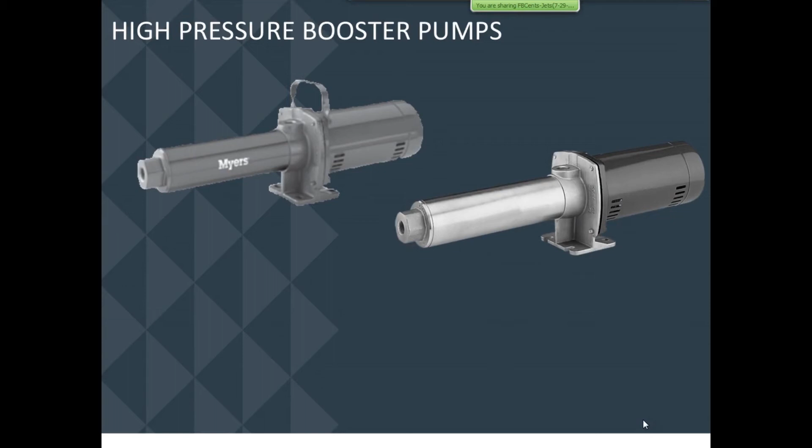So we're going to start out by talking about high pressure booster pumps. You can see by looking at these pictures here, a high pressure booster pump is nothing more than a submersible liquid end on a jet pump motor. That's all that it really is.

You can see that you can put them horizontal like this. I have had people mount them on the wall vertical. When you mount them on the wall vertical, you want the motor facing the top, not facing the bottom. The reason for that is, should there be leakage, if the motor's facing the bottom, it can have water dripping into it. Whereas if you've got that motor facing the top, if it leaks, it's going to go down. It's not going to hurt anything.

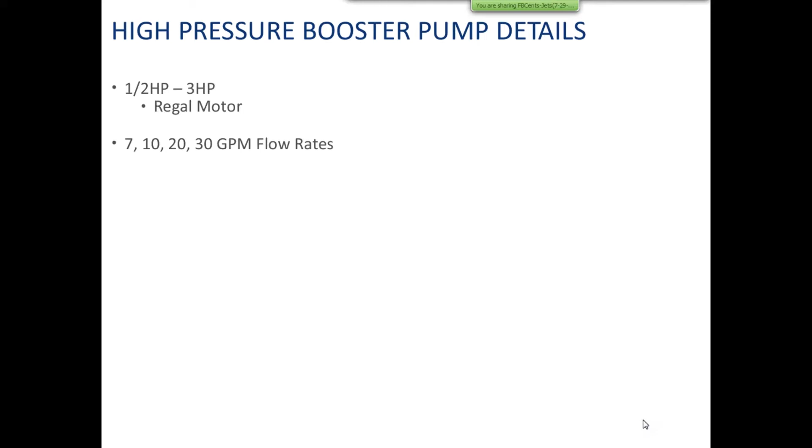High pressure booster pumps come in 1/2 to 3 horsepower. They run with the Regal motor. It used to be called A.O. Smith, but Regal bought them out a couple years ago. They all have the same flow ranges: 7, 10, 20, and 30. They all have a working pressure of 315 psi. Now, of course, that's at shut off, and you really don't want to run the pump there. So be very careful that when you're using this pump, you don't leave it at shut off for very long.

A suction lift to 15 feet. I'm not going to tell you they're easy to prime, but they don't do too bad, and they can lift water up to 15 feet.

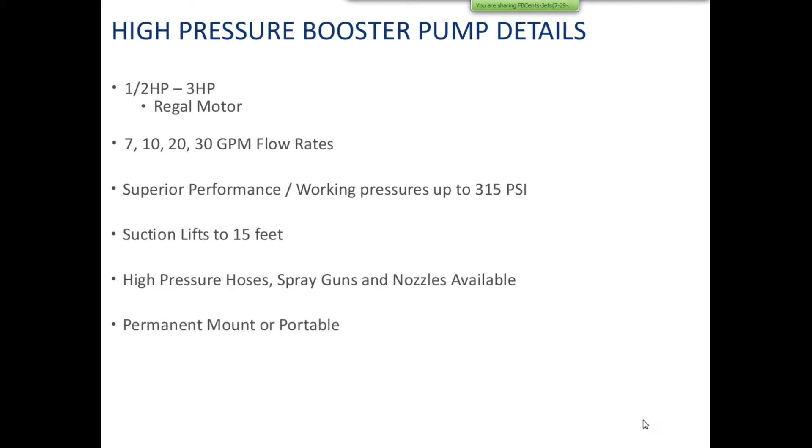You can get high pressure hoses, spray guns, and nozzles available through us. You need to just look in the catalog, and they'll tell you what part numbers to order. Again, you can mount them permanent, or you can make them portable. They've got a handle that goes with them, so you put the handle on there, and now you can pick that pump up and move it wherever you want.

Where does it get used at? Filtration and reverse osmosis - they usually require some high pressures to get through the membranes, and so that's one of the jobs this pump is used for. Pressure boosting, car wash - if you've been to any car washes, they need to have high pressure there. Residential - we sell these to people that use them to spray their house, clean their house off, and so forth. And then lastly is commercial and agricultural.

When they use them for commercial and agricultural, there's a couple different applications. One is chicken farming. What they do with chicken farming is they use this high pressure pump to spray high pressure water into the chicken coops. And as the water comes out of the nozzle, it comes out so fast that it turns into a mist, and they use that to cool the chickens.

They do the same thing for cattle too. You can use it in the cattle area where you're misting. Anybody ever been to a state fair? You know that at your state fairs, they have people misters. Same application - all you do is you run high pressure water through your system, and then have some very small nozzles, and that makes that water break up as it comes out, and it turns into a mist.

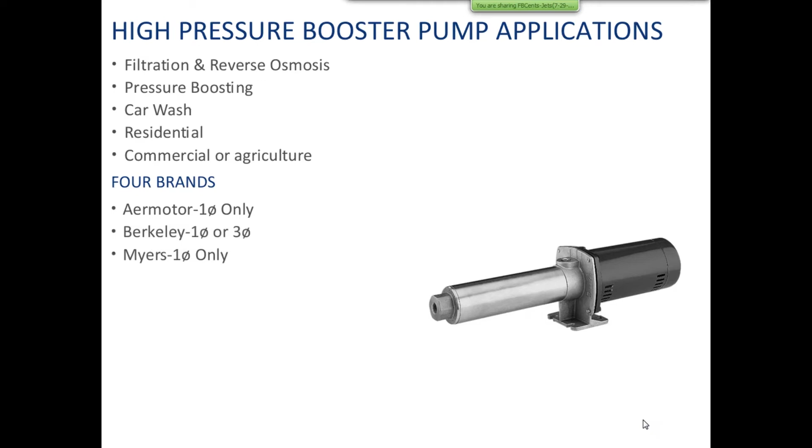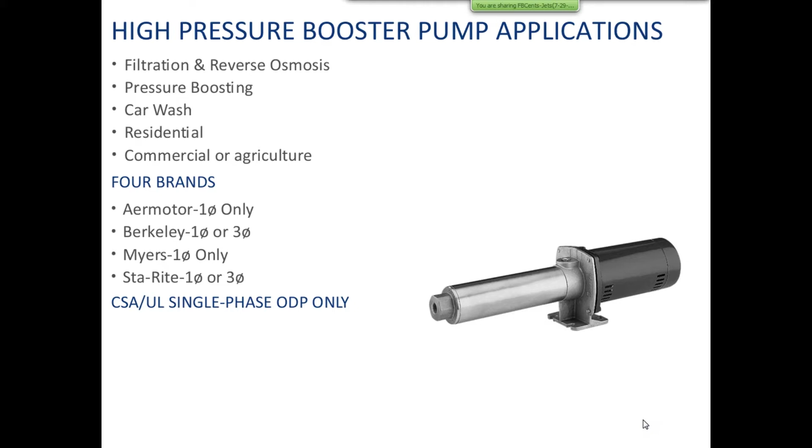So we've got 4 brands. We've got Aermotor - they come as single phase only. We've got Berkeley - they come as single or 3-phase. Myers is single phase only, and Sta-Rite is single phase or 3-phase. I want you to understand that the ODP motors used in our single phase applications are all UL, so you've got a UL listed pump there if you use an ODP motor on it.

Materials: it's 300 series stainless steel for suction and discharge. Now they both have a stainless steel suction and discharge, but they also both offer - I say both, I'm talking all 4 lines - offer cast iron suction and discharge. So you can get them either way. And of course, again, we're talking about just the suction and discharge. We're not talking the stack, we're not talking the shell. We're talking cast iron suction and discharge or stainless steel suction and discharge.

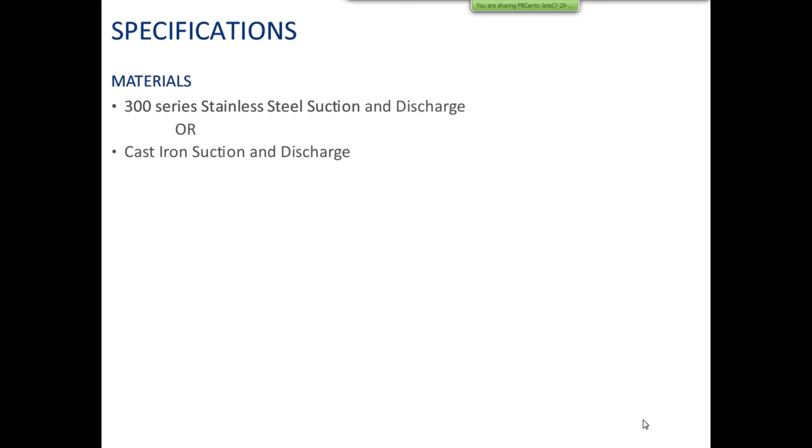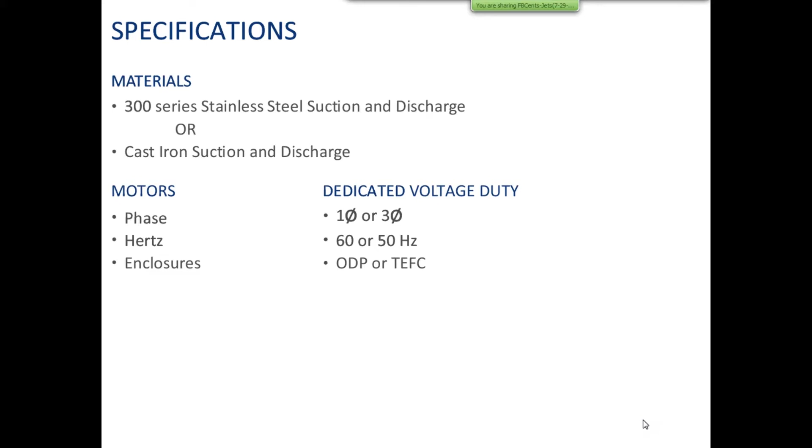You can get the motors in single or 3-phase, especially if you're using Berkeley or Sta-Rite. They come 50 or 60 hertz, so if you're selling them someplace other than the United States, you may want to check and see do they need 50 hertz. The enclosure types are ODP or TEFC. Now remember, with TEFC, you don't get service factor. So you can get this pump either way: totally enclosed, fan cooled, or open drip proof. Maximum temperatures.

The internals on these pumps are made out of acetal and polycarbonate. Because of that, 140 degrees is the maximum temperature that you can run that water through there.

I want to tell you a quick story. We had another application for it. There was a company out in Gloucester, Virginia that was using this pump to add chlorine to their water system. What they would do is pull a line off of their main line, run it through the pump, and then on the discharge side of the pump, they had a suction line connected to a chlorine dispenser. The velocity of the water moving past that suction line would pull that chlorine in, mix it with the water, and that's how they got chlorine in their city water.

They called me up one day and said, hey, your pump's not working, what can we do? I said, well, what's wrong with it? They said it's making noise. I'm sure it's a warranty. I said, well, I don't know. Have you got a discharge valve on the discharge side of the pump? Nope, no valves over there at all. None? Nope. Okay, well, I'll tell you what, send the pump back to me, I'll take it out on the lines and have them test it. If it truly is a warranty, we'll warranty the pump.

So they said okay and sent the pump back. I took it out to the lines and had it tested. They hooked it up to their testing machine and said, yeah, there's a lot of noise going on there, we probably forgot to do something, so yeah, it's a warranty. So I called the guy back up and said, well, the line says it's a warranty, so we'll give you a warranty on it.

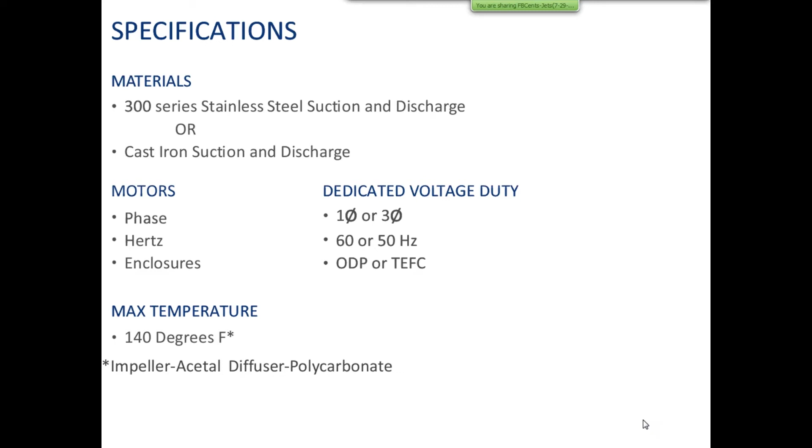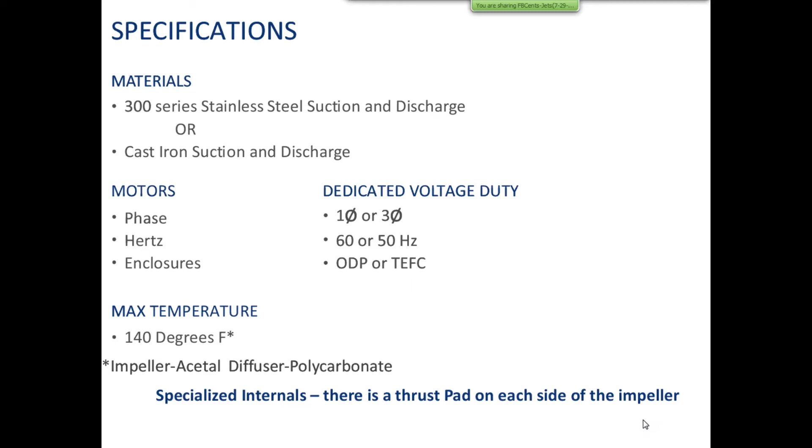It's not a hot water pump. There are special internals. We have a thrust pad on each side of the impeller. Now, that's a little different from our 4-inch submersibles. On our 4-inch submersibles, we've only got a thrust pad on the downside, but here there's a thrust pad on each side, because you're getting actual movement on this.

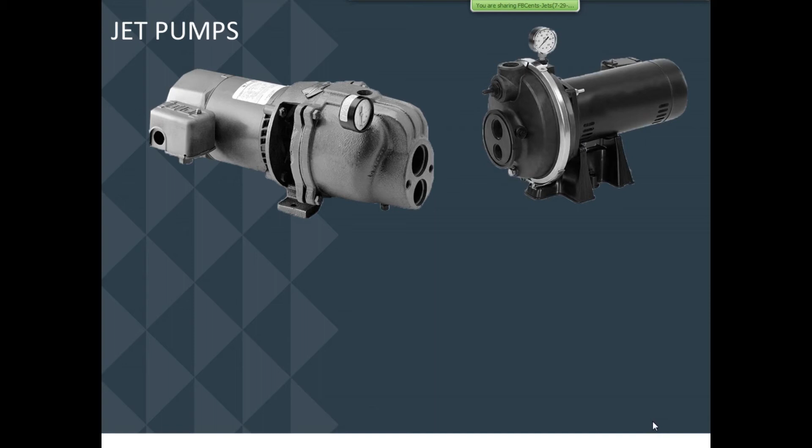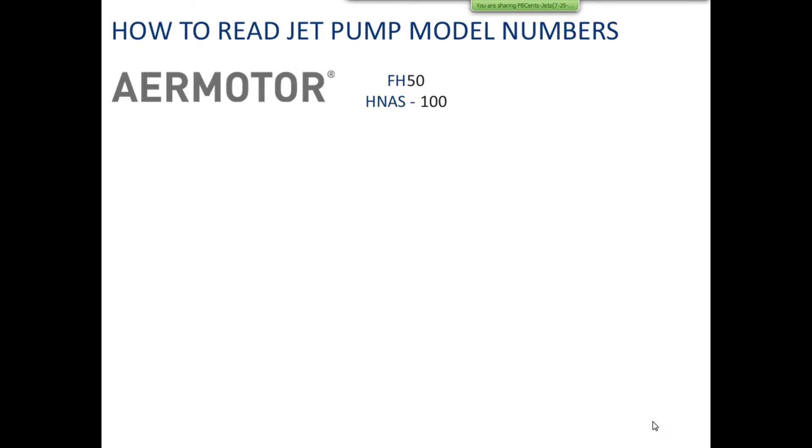So let's take a look here. Here's some jet pumps, and remember, we've got 4 brands, so there's all the different brands. I'm going to break down each one. We'll start with Aermotor, and you can see we've got an FH50 and an HNAS-100. The first part of that model number indicates the series that the pump is in. Aermotor doesn't have a large selection of jet pumps. You can see there's an FH, an FHSN, the HNAS, and the VAN2 - those are the different series of pumps. On the other side, 50 is half horsepower, 75 is 3/4, 100 is 1, 150 is 1.5, and 200 is 2 horsepower. That's the largest we go with any jet pumps, 2 horsepower. So that's your Aermotor model number.

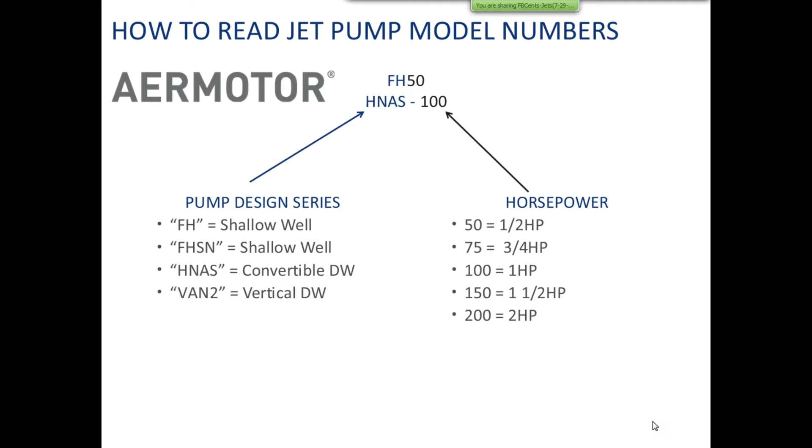Berkeley uses the 5SN-01, and you can see I've colorized each of the different things to help you understand what they mean.

For example, that 5 starts out with horsepower. So 5 is half, 7 is 3/4, 10 is 1, 15 is 1.5, 20 is 2. Remember, 2 horsepower is the largest we go on a jet pump.

They have several different series here. I don't think I've got all of them listed even. There's the SN, the HN, the PN, the HL, the MS. There's more series, I couldn't fit them all on here.

So that's just to tell you what type of series it is. I will tell you this, that N in the part number, whether it's SN, HN, or PN, indicates that it is a designated shallow well pump. You've got an HL, there's also a PL and an SL. That L indicates that it is a convertible pump, meaning that you can run it as a shallow well or as a deep well. The MS is the vertical multi-stage pump, and that is considered to be a deep well pump only.

And then the -01 is a manufacturer's revision number, and it just means that something was changed in the way it got put together. Typically, the curve stays the same, everything else stays the same. It's just they used a different material of construction or something like that.

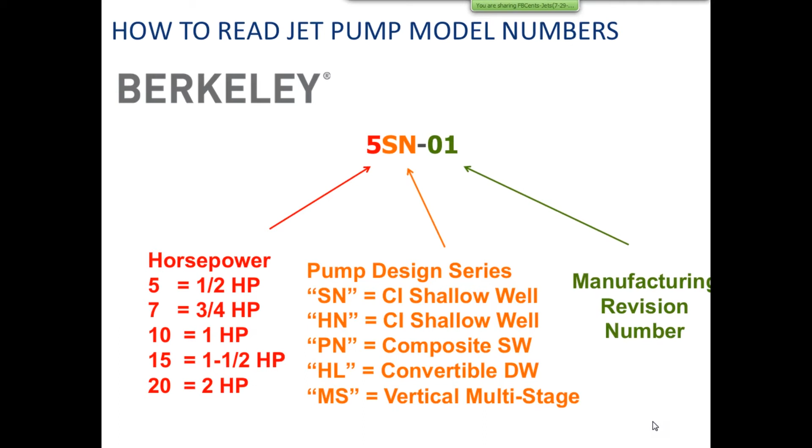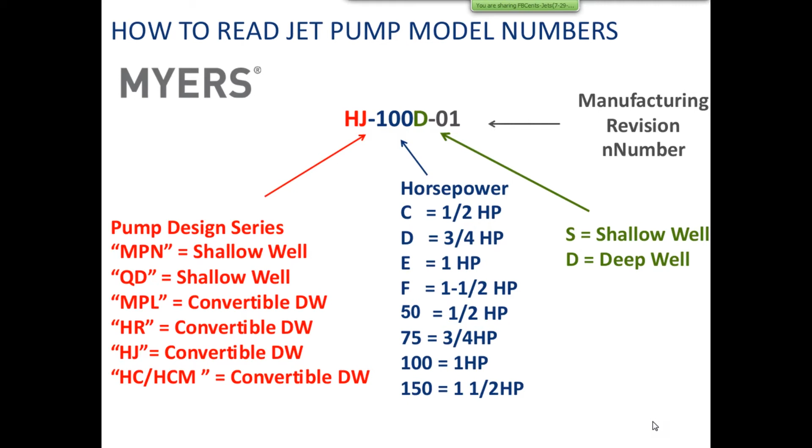S means that it's a shallow well pump. D means it's a deep well pump. D actually is a convertible pump, whereas S means you're going to get that jet bolted right on the pump. If you order an HJ100D, you're going to get a separate jet, and you can put it down the well. And again, there's a manufacturer's revision number just in case there's things that we've changed.

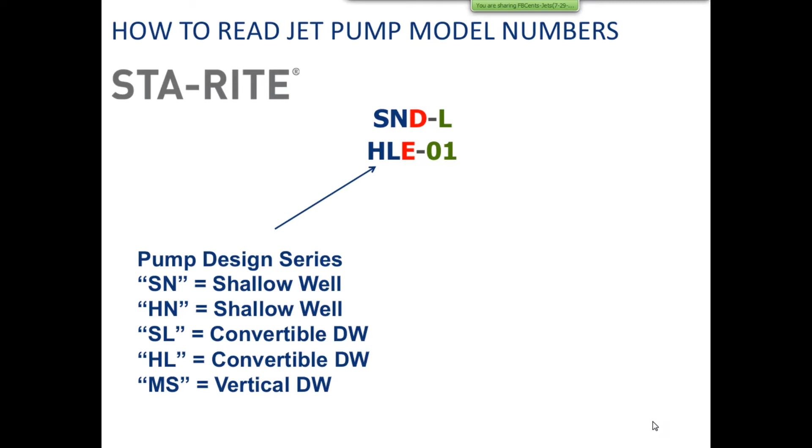All right, Sta-Rite. I've got two model numbers here, an SND-L and an HLE-01. Again, you'll notice by the color, HL and SN, those are series designs. Again, I do not have them all in there. There's SN, HN, SL, HL, MS, HMS, PL, PN, FN, FL. Oh, there's a ton of them.

Okay, so Sta-Rite does have a lot of jet pumps. And then there's the horsepower designation. Sta-Rite was started in 1934 by the then president of A.O. Smith, and he wanted to make a pump that would stay right. That's how they got their name, Stay Right.

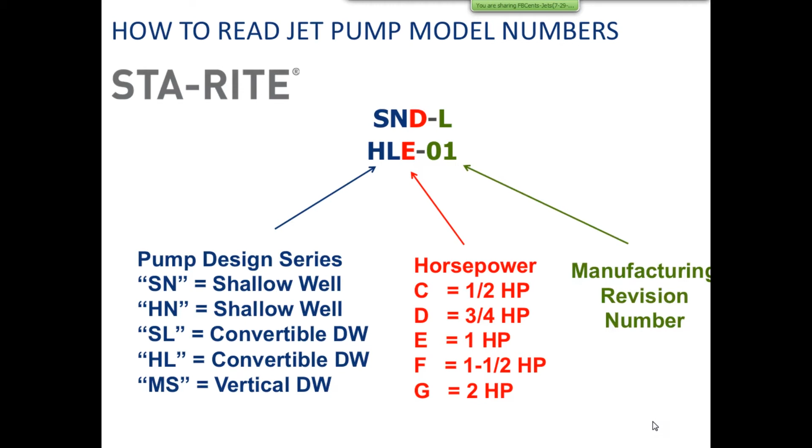And A.O. Smith has always used alpha characters for horsepower. So C is a half, D is 3/4, E is 1, F is 1.5, G is 2. Remember, 2 horsepower is the largest jet pump you're going to get. And then you've got a manufacturer's revision number, and also the L means UL listed.

Now let's take a look at some of the features here. All right, proven materials. We've got reinforced polypropylene diffusers, and we've got Lexan Venturi and nozzles. Now I want to point out just on those 2 points there that we had the largest pump company, or we were the largest pump company with the most plastics. So we made our own plastics for years. And so yes, we really helped develop that kind of stuff.

They use a square D adjustable pressure switch. There are 2 different square D switches, just so you know. And so the S series pump uses the less expensive one. The H series pump uses the more expensive one. The difference is the less expensive one only has the main screw that holds the cover on the square D pressure switch, whereas the more expensive one has a second screw in there, which allows you to set the off pressure, so you can change your off pressure on those pumps. You can't do that with the standard pump, okay?

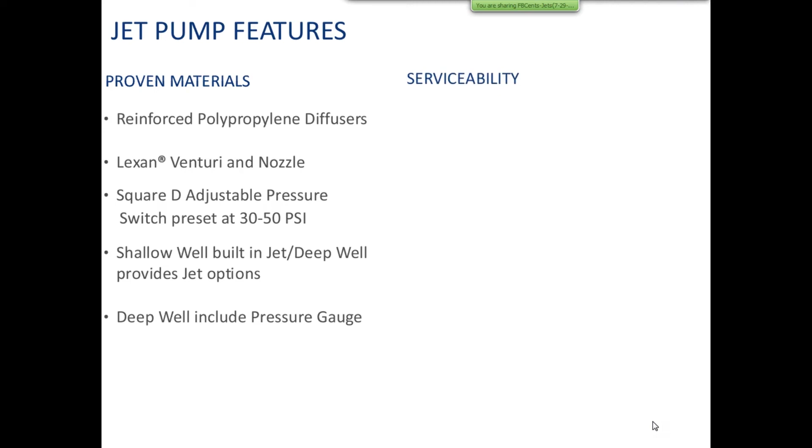You've got the shallow well built in jet, or the deep well provides the jet options. Remember, when we say deep well, we're talking convertible, so you can use it shallow or deep. And then, of course, the deep well also includes a pressure gauge. What makes it serviceability here is that it is a standard 1.25 inch suction, 1-inch discharge.

Just about everybody's got that. There is an easy access clean out plug for your nozzle. On the very front of the pump, on your shallow well jet pump, you'll find a pipe plug. When you take that pipe plug out, that takes you right into the back of the nozzle. So if something is plugging it up, you can get in there and unplug it without taking the whole pump apart. Now, that's not to say that sometimes you don't have to take the pump apart, but if things work out well, you wouldn't have to.

There's a pro-style composite switch tube connectors. In other words, what we're using here is a tube connector where you simply push in on the connector and you can push the tube in or pull the tube off. It used to be in the old days that they had bayonet fittings, and with those bayonet fittings, you were going to cut that tube, then cut the portion off, and you'd have to hope that the tube was long enough to reconnect it. Otherwise, you had to buy a new tube. But with these new tube connectors, you don't have to worry about that.

Built-in pressure regulator on your deep well pumps. It's not on the shallow well, they don't need it, but on your convertible type pumps there are actually two chambers, and one of those chambers has a hole in it that connects the small chamber to the big chamber. The small chamber is where you're going to find that pressure regulator. It sits right over that hole, and basically what you're doing is regulating how much pressure you're allowing to go down to that jet when you're using this pump as a deep well pump, because if you don't have enough pressure going down to the jet, it's not going to work. You're going to regulate that properly so you can set that depth to water, and that means it keeps that certain amount of pressure on. Whatever water you get, that's what you get based on that depth to water.

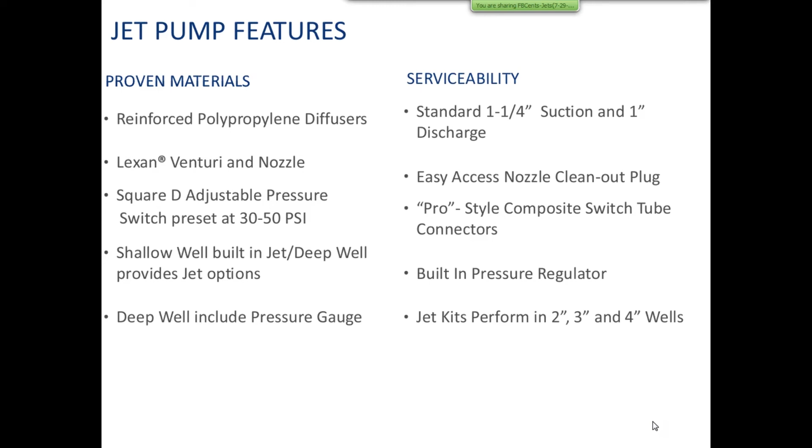Okay, let's break them down by type now. So the CJ pump, it's a Sta-Rite pump. It's stainless steel, corrosion resistant, designed for RO water. It only comes in 1 and 1.5 horsepower. It primes at 15 feet to water, and it'll prime in about 3.2 minutes, which is pretty good priming. Performance-wise, jet pumps typically are listed at 40 psi. So the 1 horse will do about 11 gallons a minute at 40 psi, and the 1.5 horse will do 16.2 gallons at 40 psi. Now again, this is also at 5 foot of lift, not including the 15 foot of lift, which is just your priming. Your lift for this flow rate here is 5 foot. It is shallow well only. Remember, shallow well means 25 feet to water.

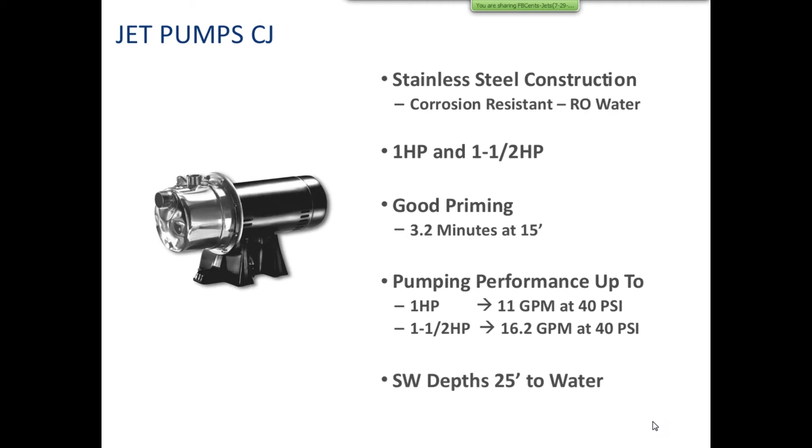Now, the HN HL series, you can see by the pictures there, the HN has the jet formed right into the front of the body. The HL has 2 holes, which makes it a convertible pump. They're both cast iron construction, and they run half, 3/4, and 1 horsepower.

Fast priming at 15 feet, that shallow well will do 1.1 minutes to prime. Shallow well pumping performance, again this is at 5 foot: half horsepower is 12.5 gallon, the 3/4 horsepower is 20.8, and the 1 horsepower is 28.3.

Your shallow well, remember, means 25 feet to water. With the jets that you can use on here, if you put a deep well jet on, 4-inch deep well jet, 2-inch deep well jet, 3-inch deep well jet, takes you down 120 feet. Yes, remember that as you go down, your flow rate reduces. So you get down to about 120 feet, you might only be getting a gallon or a gallon and a half of water a minute, but still, you're getting something.

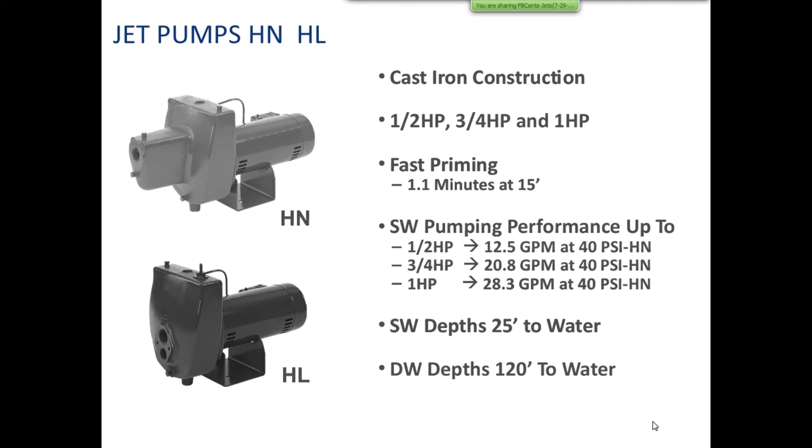The SL series, now the only difference between the HL and the SL, if you look at these pumps, the only real difference here is the S and the H. Otherwise, the part numbers and everything else pretty much are the same.

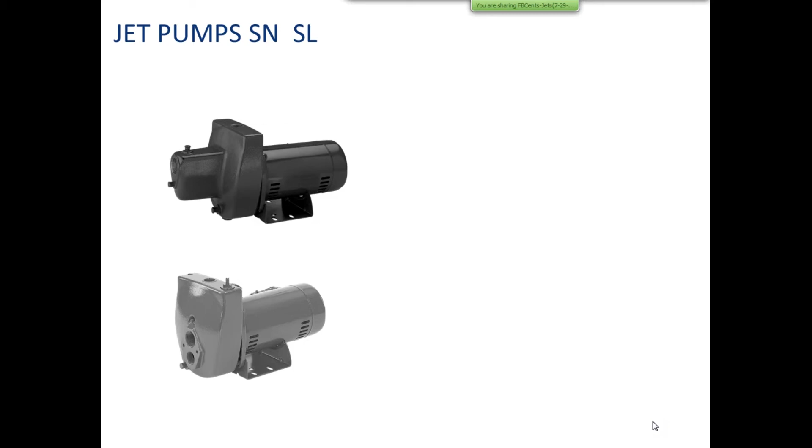But what does it mean? Well, you'll notice that the H came in half, 3/4, and 1. If we take a look at the SL, it's got that same cast iron construction.

It now goes half through 1.5. The S means standard service factor. So when we say it's a 1.5 horse motor, on there that's a 1.5 horse pump. Believe me, it's a 1.5 horse motor. On your HL series, H means high service factor. When you increase the service factor, you decrease the horsepower. So 1/2 through 1 there would be the same as the 3/4 to 1.5 here, just so you understand that.

Again, at 15 feet with that shallow well, you're going to get 1.1 minutes for priming. And here's your performance. Remember, you're 25 foot to water. 7.9 for the 1/2. Now remember, the 3/4, the 1, and the 1.5 are the same as the 1/2, 3/4, and 1 on the HL series. So you see the flow rates are the same also.

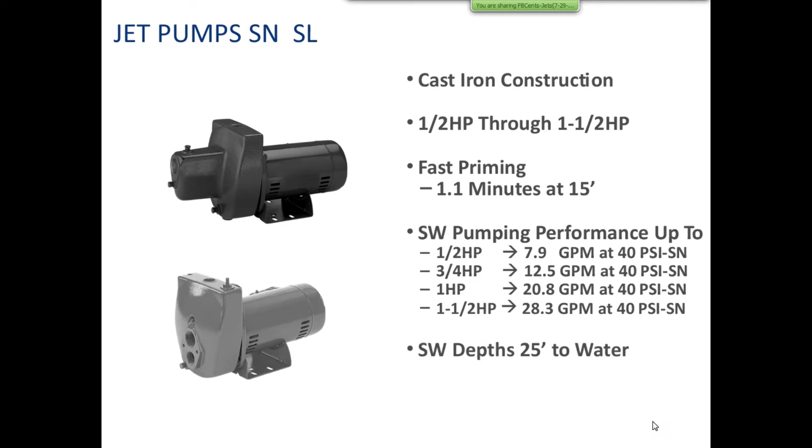Again, just a reminder, 25 feet to water is shallow well. Anything deeper than that is considered deep well. And these can go down to 120 feet also.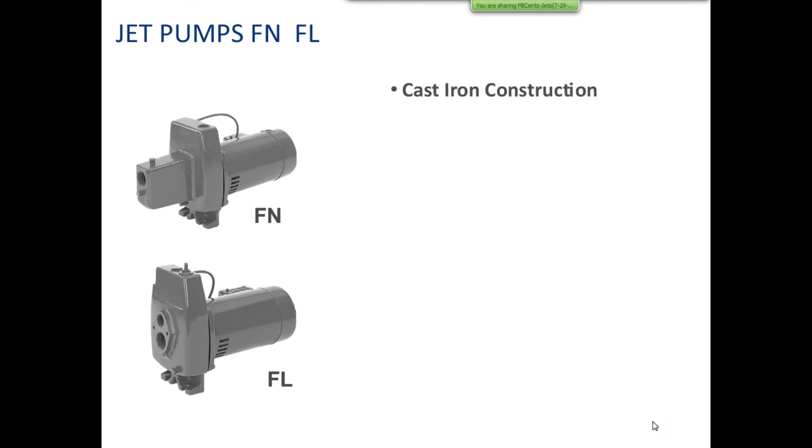Your FL and FN, again, you're going to notice they're a little different here. Not quite as big of a body there, but they are cast iron. They only come 1/2 and 3/4. They're 1.7 minutes, that's the shallow well, at 15 feet. And the shallow well performance at 5 feet is 6.9 for the 1/2 horse and 12.5 for the 3/4 horse. So they're really a pretty decent pump.

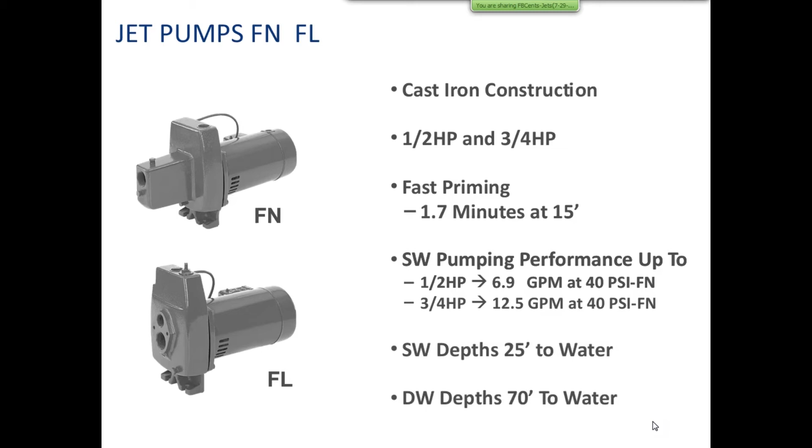Considered a lower line pump, but for what you're getting, that's quite a bit. Again, just a reminder, 25 feet shallow well, 70 feet for deep well, because you're only doing 3/4 here. Now your PL and PN series, the P in there means plastic or composite.

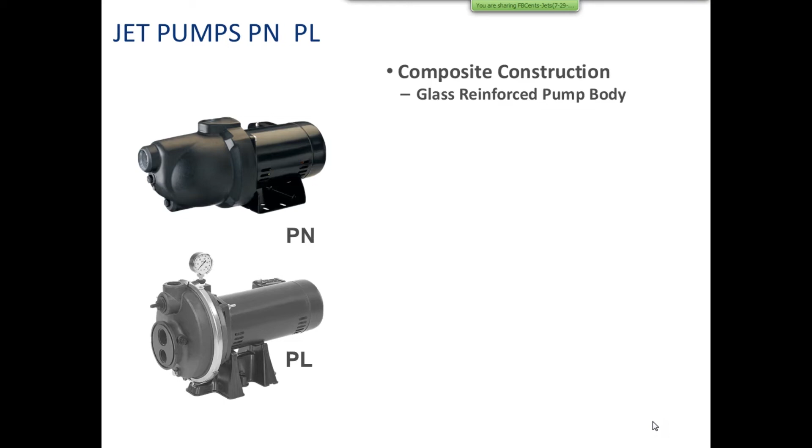So if you look at the pictures there, you can see these have a composite pump head on them. It is a glass reinforced pump body, so it's very, very tough. Obviously, because it's plastic, it's corrosion resistant. They are 1/2 to 1 horsepower in shallow well, that's your PN. And then they go 1/2 to 1.5 in your convertible, that's your PL.

The shallow well performance, remember we're at 5 feet to water here. 1/2 is 7.4. The 3/4 is 10.7. The 1 horse is 16.8. Remember that we only go up to 1 horsepower in shallow well, but you can take that 1.5 horse because it is a convertible pump. You can put the jet right on the front of it, and that 1.5 horse at 5 foot to water is going to give you 26.2 gallons at 40 psi when you're using it as a shallow well pump.

So you put your shallow well jet on there. Performances are obviously going to change when you put the deep well jet on. At 25 feet to water for shallow well, and here we're going 120 feet to deep well again because we got our 1.5 horse back.

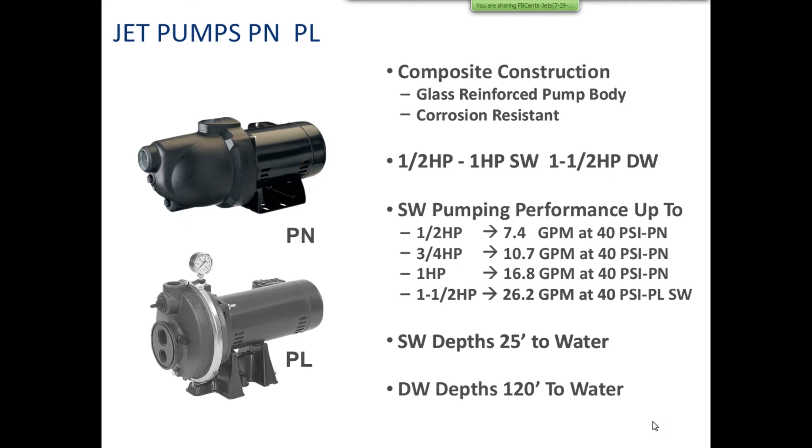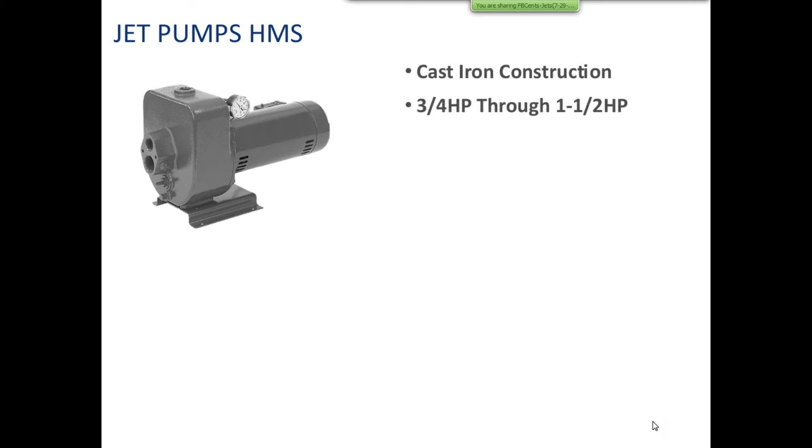All right, now here's a special pump. It's called the HMS series. It is a cast iron construction. You can see a nice heavy body there. It does go 3/4 to 1.5 horse. It is a dual stage impeller diffuser. So in other words, they've got 2 impellers in here and 2 diffusers in here. And because of that, what that's going to do is increase your pressure.

So your pumping performance, shallow well, 3/4 horse, notice it's 8.8 gallons at 40. Remember, we're at 5 feet to water here. 1 horse is 12.2 at 40, and the 1.5 horse is 15.9 at 40. If you go deep well with this one, the 3/4 is 12.8 at 40, this is at 30 feet to water. 1 horse is 17.8, and your 1.5 horse is 21.7.

Here's what makes this pump so special. You can put a 1-inch pipe plug in that top hole. That's the drive hole. Yes, Sta-Rite was always drive over suction. If you notice, all the other pumps we were looking at are suction over drive, but they always used to be drive over suction, and since this is a special pump, they left it the way that it was.

If you plug that drive hole, now you can use it as a self-priming centrifugal pump for sprinkling. At 5 feet to water, you're talking 24 gallons a minute at 40 psi, 33 at the 1 horse, and 46 at 40 with the 1.5 horse. So you can see this pump can really deliver water, and it's really got a wonderful application here. You can use it for a lot of different things.

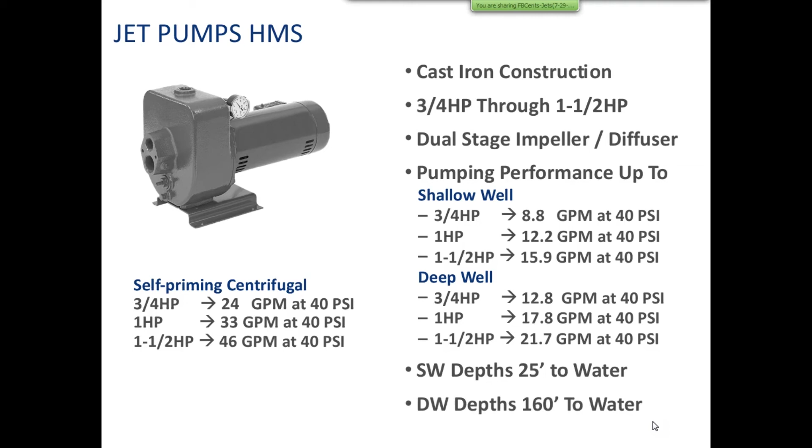Shallow well, again, just a reminder, 25 feet. And deep well, because this one is a 2-stage pump, deep well is 160 feet. Remember, it's the pressure required down the well that allows you to go down deeper. So because this one creates higher pressure, because it's two-stage, you can go deeper with it.

Now, the multi-stage series, the VMS series. It is a cast iron construction. It's 3/4 through 2 horsepower, and notice it is vertical. Dual stage impellers and diffusers. There are actually 2 impellers and diffusers in the 3/4 and 1, and there are 3 impellers and diffusers in the 1.5 and 2. Factory installed pressure regulator.

You can see that it's an external pressure regulator. It's not an internal regulator here. Okay, pressure gauge sits on top of that regulator.

All right. Deep well 30 feet performance, because remember, this is considered a deep well pump only. 3/4 horse at 30 feet to water will give you 10.2 gallons at 40 psi. The 1 horse will give you 12.1. The 1.5 will give you 12.2, and the 2 will give you 12.2. The main difference between the 1.5 and the 2 is how much you're going to get as you go deeper.

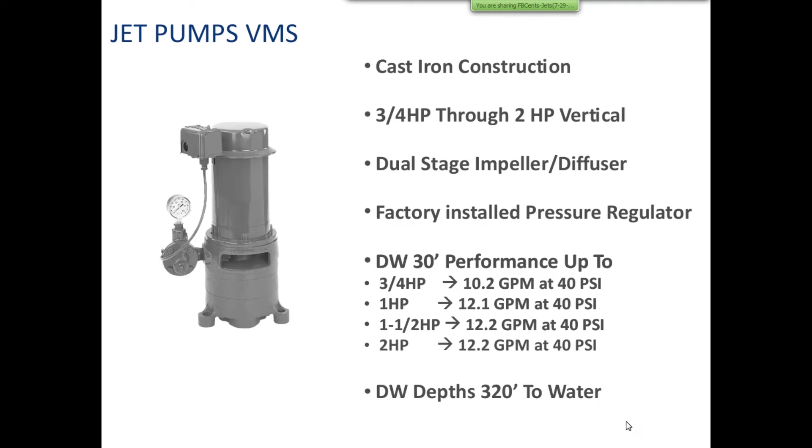They have depths because there is a 3-stage pump here. Your 1.5 and 2 are 3-stage pumps, you can go down 320 feet. Now again, these are a very high pressure pump.

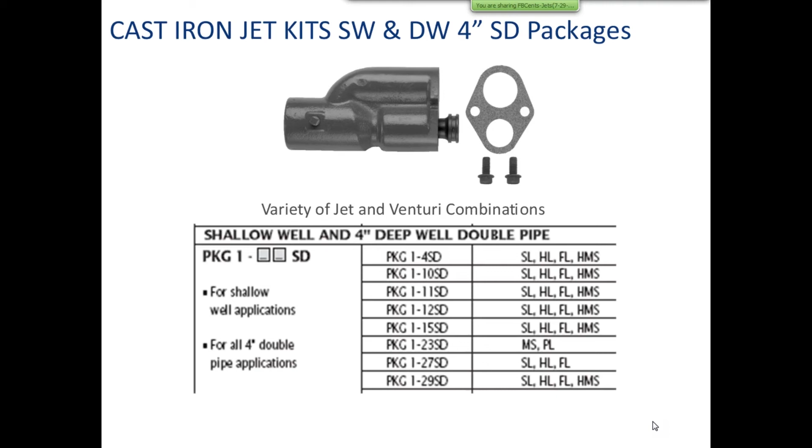SD means shallow or deep. There's only one body, there's only one nozzle, there's only one diffuser. So it's either going to get used as shallow or it's going to get used as deep. Now, some of them might be used as shallow or deep. Some of them are just shallow. Some of them are just deep. But that's what SD means, is shallow or deep.

Then we have a shallow and deep well 4-inch package that's called the CK package. When you look at the CK package, you're going to notice that there are multiple venturi tubes. Still only one body, only one nozzle, but multiple venturi tubes. Now, this is really, really important that you understand this, because in order to use this CK package, you have to make sure that you're putting the right venturi tube in when you put this thing on the pump.

If you look carefully, you'll notice the white venturi tubes are a little longer. And if you look carefully at them, on the ends of them, on the discharge side, they have a notch. That notch is designed strictly for insertion. So when we insert this into the body here, we use that notch with an air tool to tighten it up and torque it properly.

The black venturi tubes are round all the way on the discharge side, and the reason for that is because they're going to butt up against that diffuser ring that I was pointing at when I started the presentation and told you about the factory schools. So make sure that you've got the right venturi tube in there.

And yes, we get phone calls all the time. Somebody will say, I hooked this pump up and I can't get it to prime. And I'll say, which venturi tube do you have? And they'll say, well, whatever one was in it, as if the other ones were just extras. And I'll say, okay, go get the other venturi tubes and tell me what the number on those venturi tubes are. And sure enough, they'll have the right one in their hand. And then I'll have to say to them, pull that jet up and put the correct venturi tube in. You won't have any problem with it priming.

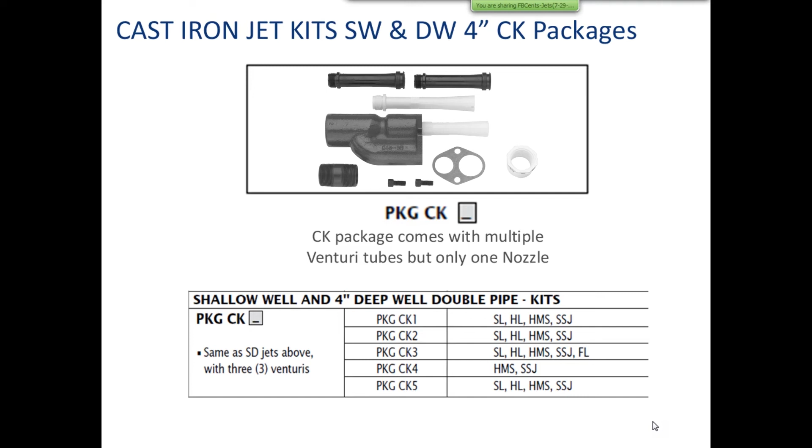So how do you know which venturi tube to use? It's going to be in your catalog. So you got to have a dealer catalog, and that'll help you.

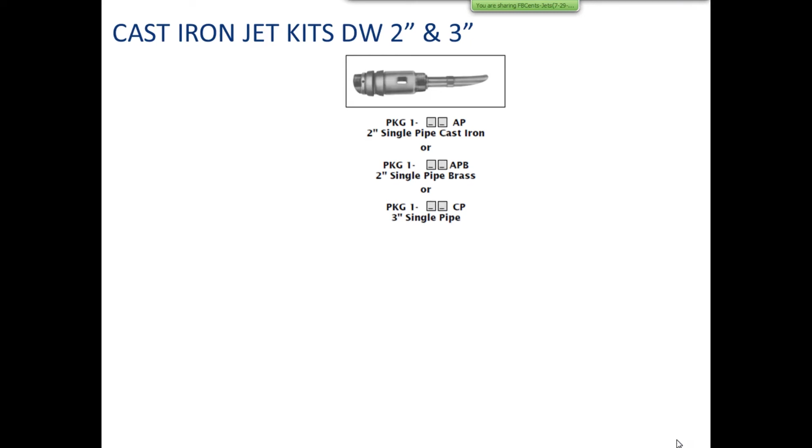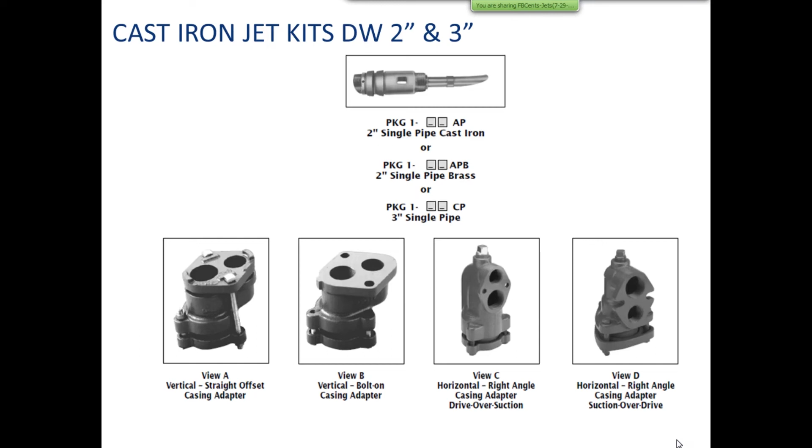Now, of course, that also means that you have to have the correct adapter for it. So I want you to look at these adapters here. You'll see there's view A, view B, view C, and view D. Very important, when you look at C and D, you should recognize right away view C is the old Sta-Rite way of doing it. That one would get used on the HMS series pump. View D pretty much gets used on all the other horizontal pumps. View A and B get used on the multi-stage pumps, the vertical multi-stage pumps.

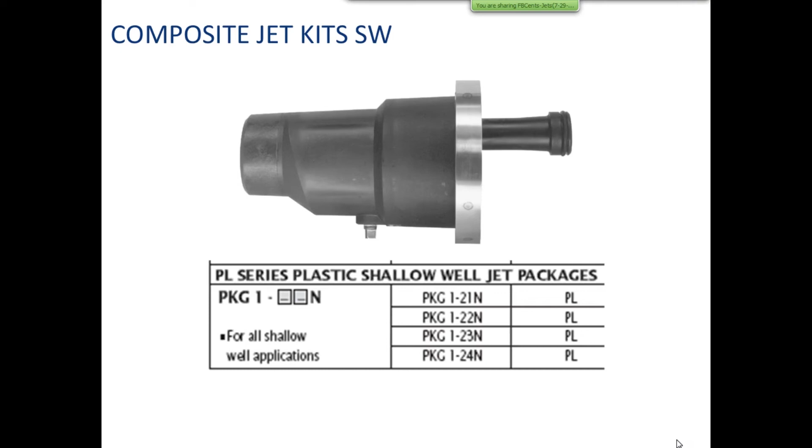Now, the composite jet, this is for shallow well use only. When you're using the PL series, and you can see that's the only series of pump that's in there, based on the horsepower, we'll decide which one of these jets you're going to use. The 21 is the half, the 24 is the 1.5. So if you want to use that PL series pump as a shallow well, that's how you're going to do it.

Now, this is the Aermotor pump, and you're going to notice again they've got a series that starts out here. So SPC is a series, SPCA, CT, DMC. Those are all series of pumps. They do use on some of their pumps a letter to indicate the head. So M means medium head, H means high head. If there is not a head letter there, it's going to be a high head pump, because most people want that high head, that high pressure.

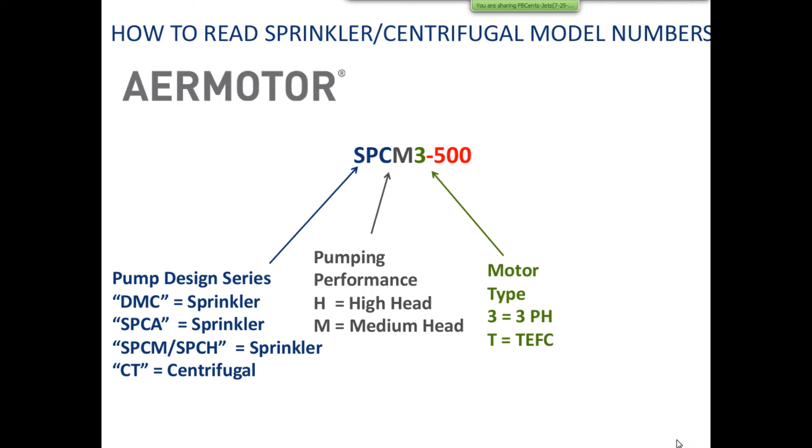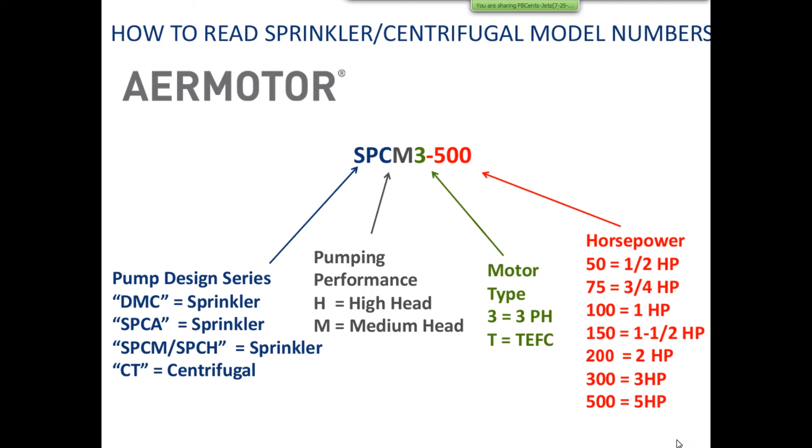The next one here is your motor type. You'll only find that if you're using 3-phase or TEFC. There's nothing there if it's single phase. And then, of course, that last number is your horsepower. You can see here, 50 is half, 75 is 3/4, 100 is 1, 150 is 1.5, 200 is 2, 300 is 3, 500 is 5 horsepower. So that's your Aermotor line.

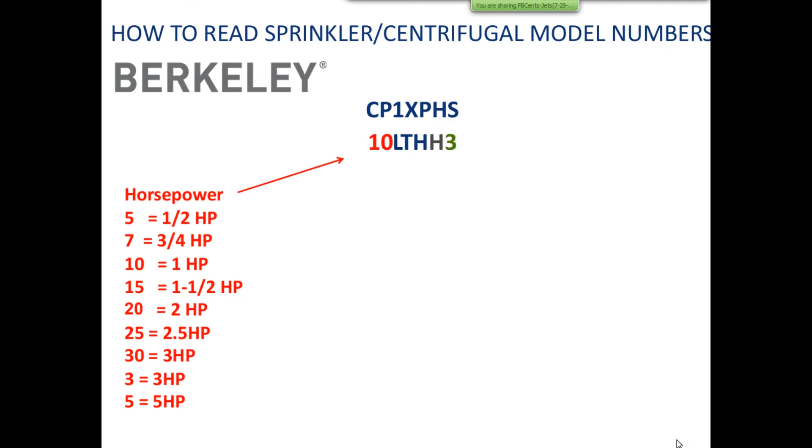The LT, there's LTHH, SSHM, BPD, LT, SSCX, CP, CB, and C. There may even be a couple more I couldn't fit on there. So those are your series of pumps. Most of those are sprinkler pumps.

The CP, CB, and C series are straight centrifugals. That second letter is the head. So you've got H for high head, M for medium head. Remember what that means: medium head means more flow, less pressure. High head means less flow, more pressure. That's the difference between them.

In your model number, sometimes it will tell you whether it's 3-phase or not. Remember, if nothing's there, it's single phase. I'll also tell you all of your centrifugal pumps, including the sprinkler pump, that 10LTHH3 are going to be sold through catalog numbers, but at least you'll understand.

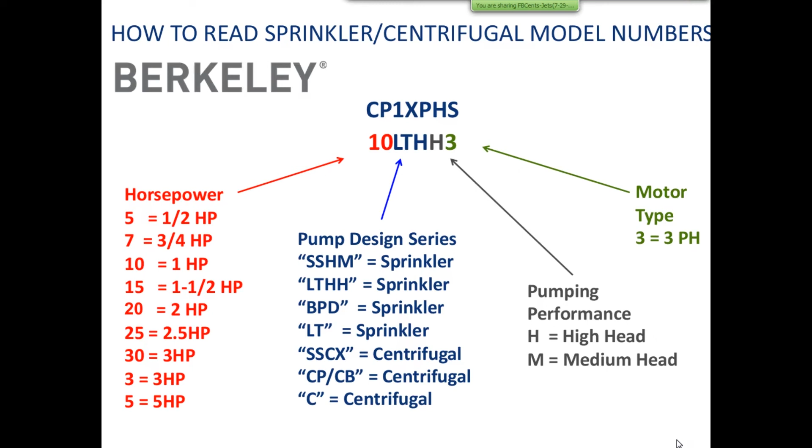The CP1, the 1 is the discharge size. So you'll get a 1, a 1 1/4, and a 1 1/2. They're telling you the discharge size of the pump.

Now, Myers, we've got a QP10-3 and a CT10B3. Once again, Myers has a relatively short list here. There's the QP pumps - those are definitely Myers pumps. The PQP is really the PD series, the Sta-Rite pump painted green. And the CT is their version of the straight centrifugal pump.

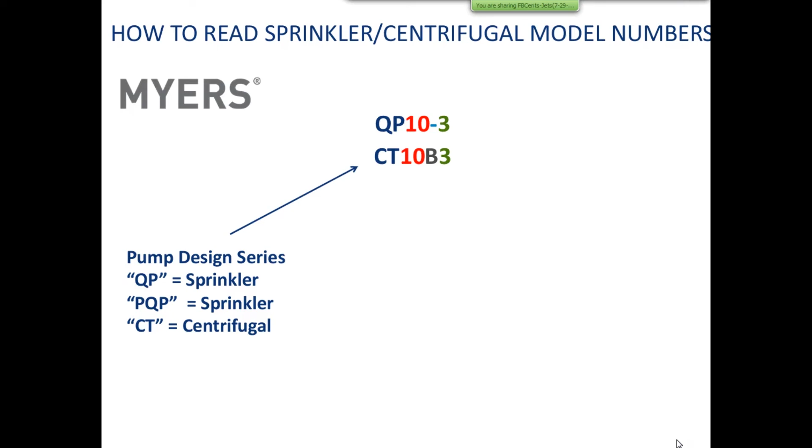Horsepower, they follow their horsepower conventions here. So 5 is half, 7 is 3/4, 10 is 1, 15 is 1 1/2, 20 is 2, 30 is 3, 50 is 5. Now you'll notice the B after the CT, and the reason for that is because that pump can have a brass impeller in it.

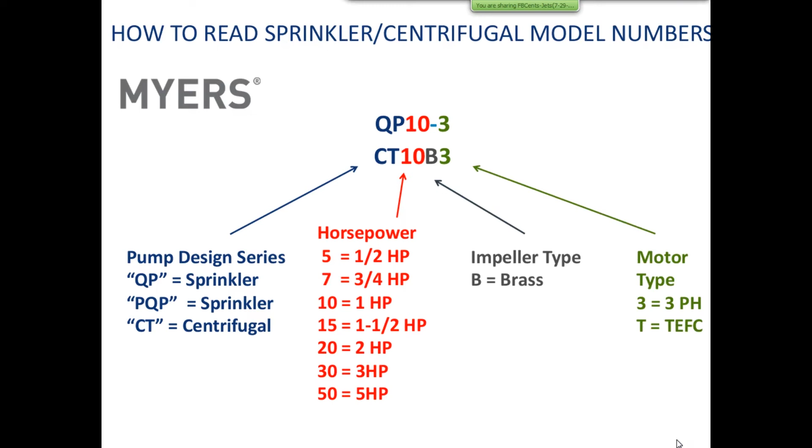So you can get it with a plastic or a brass impeller. If you don't put the B in there, you're getting a plastic impeller. And of course, the 3 at the end of both of those numbers indicates 3-phase. If it's not there, they are single phase.

Sta-Rite, we've got a DHG-L and a JME3-01. And again, you've got your series number, DS3. They make a DS2. There's the PD, the D, the CC, the J, the DPC. You could go on - there's more.

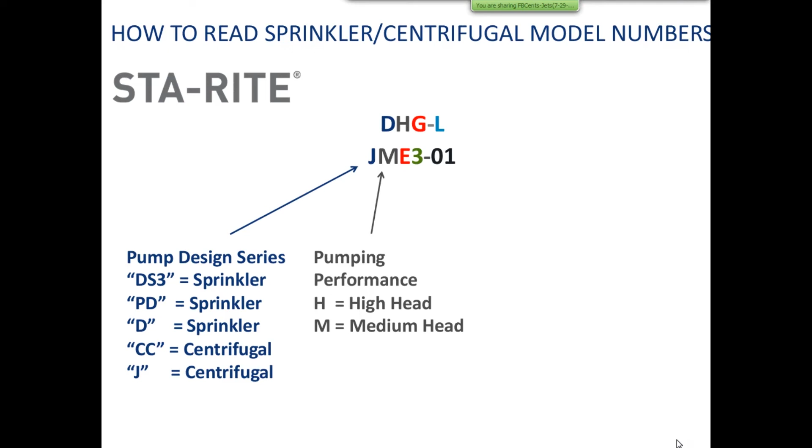A head letter - Sta-Rite always uses a head letter. So you've either got an H for a high head pump, M for a medium head pump. Typically on your sprinkler pumps, most of those are going to be high head. When you get in your 3 and 5 horsepower, you can get a medium head. But on all your 2.5 horsepower or less sprinkler pumps, they're going to be high head only anymore. Now, mind you, I've been around long enough to remember the day when they did have medium head and low head pumps, but they don't anymore.

Horsepower, again, they're going to follow their A.O. Smith predecessor who put them in charge here with using alpha characters for horsepower. So C will be half, D is 3/4, E is 1, F is 1 1/2, G is 2, H is 3, J is 5.

Now you notice I skipped over the 2.5 horsepower. That's because what they're going to do with the 2.5 horsepower - you will find it in the J series, you will find it in the D series - they're going to throw in an extra head letter. So it'll be a DHHG if it's a 2.5 horsepower. DHG would be a 2 horsepower. DHHG would be 2.5 horsepower. A JMMG - so if you have an extra head letter with the G, that's going to be your indication that it's a 2.5 horsepower.

Now they will tell you the motor type again. 3 is 3-phase; if it's not there, it's single phase. T is TEFC motor. And then you've got a manufacturer's revision number and a UL listing here.

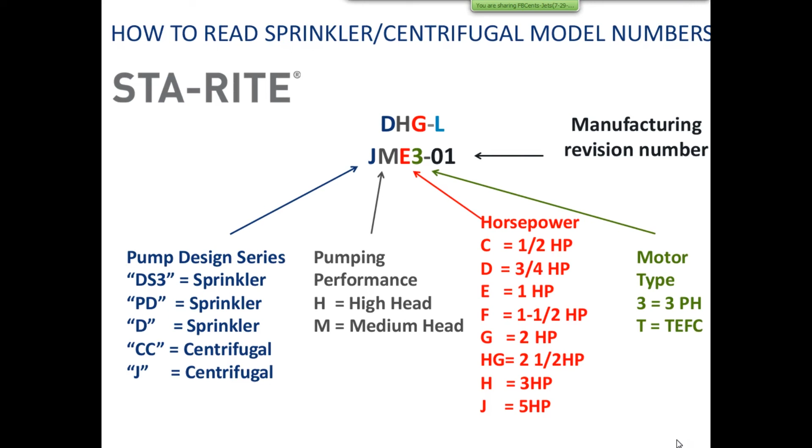Not all, but most of our pumps are CSA approved. If they meet CSA, they generally meet UL, because CSA is a little tougher than UL. CSA is the Canadian standard.

Some features here: interchangeability, motors, impellers, diffusers, pressure switches, parts packs, modified standards. Now, modified standards are one-offs - in other words, you're changing the pump a little bit, doing something a little different to it.

Remember, I said that MS series pump is strictly deep well. There are a few occasions out in the Carolinas they use them a lot. I see them in a few other places too, where they're going to use that MS series pump as a sprinkler pump. They're going to plug the drive hole, which is the one that's offset, not the one in the center, and they're going to use it as a shallow well pump. Of course, they're not going to put a jet in it because it doesn't have a shallow well jet.

And what that means is they're going to get lots of water, and because they're a three-stage pump, you're going to get lots of pressure out of them. Now, of course, in doing so, you run the risk of running too much water through there, because without a jet on there to control the flow, you wind up with a lot of flow.

And if you get too much flow out of there, what winds up happening is the motor burns up. So we make a modified standard where we put a higher horsepower motor on the pump, and then you've got a little more oomph in that pump, so you can get a little more out of it. And that's what modified standards means.

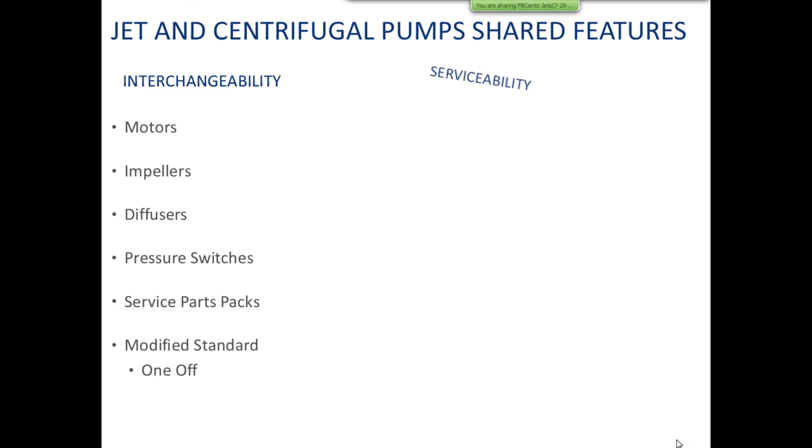Serviceability, there is a drain port for ease of servicing and winterizing. Remember, if you live in an area where it freezes, pumps don't like frozen water. That has a tendency to break them. So you want to winterize them by draining them. And there's a drain plug on all of our pumps so that you can, and it'll be at the lowest area so that you can drain that water out, get all of it out, okay?

We do make a back out construction. Now what this allows you to do is it allows you to pull the motor and the internal components off out of the back of the pump. That means you don't have to disturb the plumbing. You can leave the volute case or the pump body, depending on which kind of pump you've got, hooked up, and that way you can take it out and you don't have to worry about disturbing your piping.

Now, of course, I will warn you to make sure that you're supporting that piping, because the bottom line is those pump bodies, if they don't have something supporting them, they can get pretty heavy on that piping, and that can cause a problem when you go to put that thing back together.

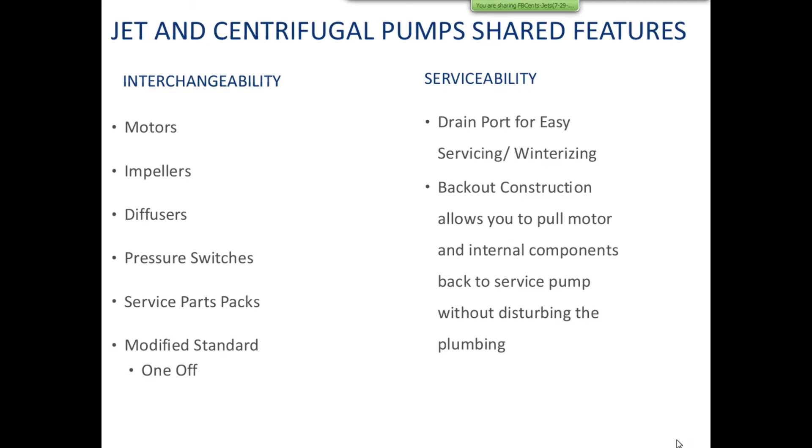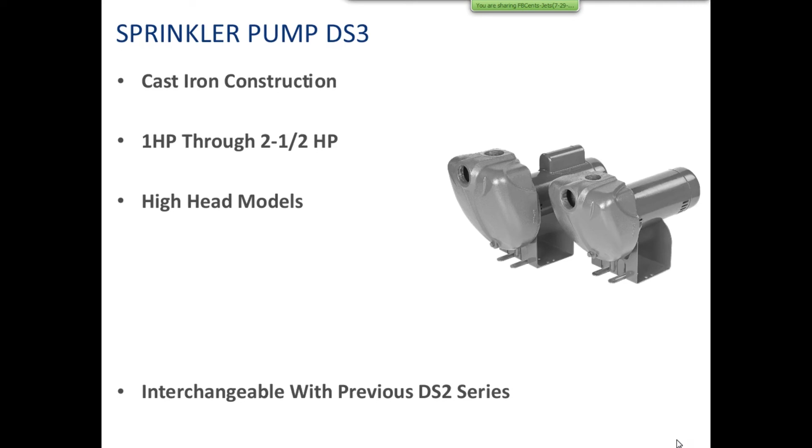It is fully cast iron construction. It goes 1 through 2.5 horsepower. It is a high head model only. As I mentioned, 25 years ago, they used to make a medium and a low head version of it. Now it's only high head.

At 5 feet to water, now notice here we're at 30 psi because it's a sprinkler pump. So you'll get 33 gallons at 30 psi out of the one. The 1.5 will give you 53 at 30, and the 2 horse will give you 60 at 30.

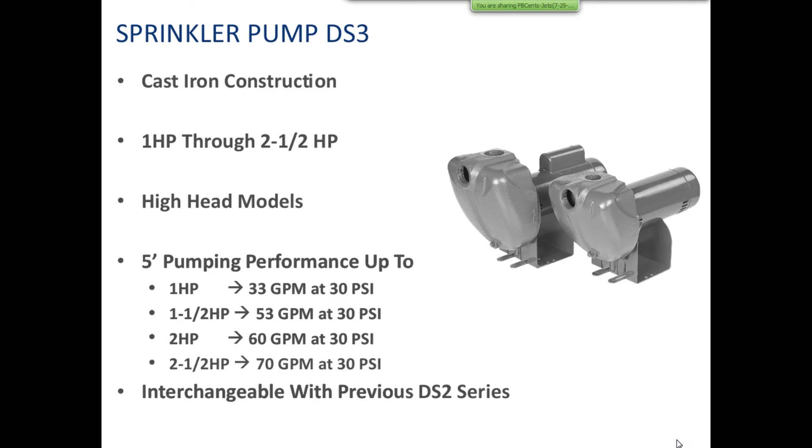It is interchangeable with the previous DS2 series. The suction and discharge hole in the DS2 is in the exact same place as the DS3. So therefore, you can change one right out. It doesn't make a difference. Okay, 2.5 horsepower is 70 gallons a minute at 30 psi.

Your sprinkler pump PD, and again that P means that it is a composite construction. So you've got a glass reinforced body and seal plate on that pump. It's 1 to 2.5 horsepower. Of course, because it is glass reinforced plastic on there, it's corrosion resistant.

Now, it doesn't mean that you can use this in saltwater applications, because we do get calls every once in a while where somebody says, I have a fish farm and I need to pump salt water. I'm not going to say it won't pump salt water. I'm just going to tell you the mechanical seal won't last, because the mechanical seal used in here actually evaporates the water going through it. So as the water goes through that mechanical seal, what winds up happening is you wind up with a salt residue that eventually causes the seal to leak.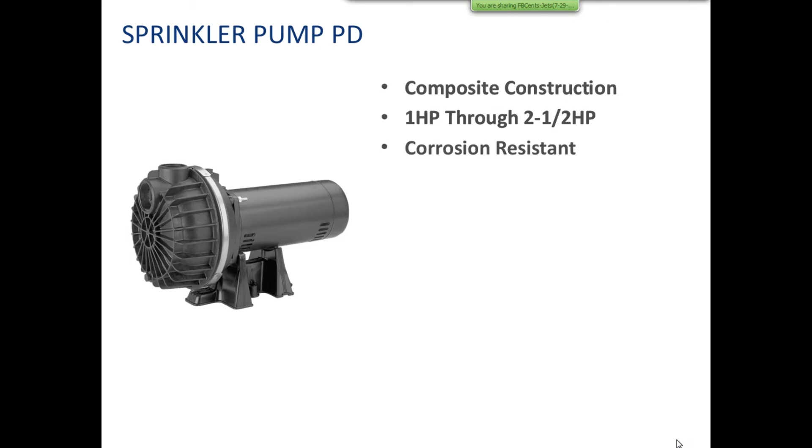So even though the pump itself is corrosion resistant, that mechanical seal doesn't work well with salt water. As I mentioned, glass reinforced body. There's a priming and gauge port up on top. 5-foot pumping performance, at 30 psi 1 horse is 35, the 1.5 is 48, the 2 is 50, and the 2.5 is 66. So you can see there's some very similar performance to that cast iron version.

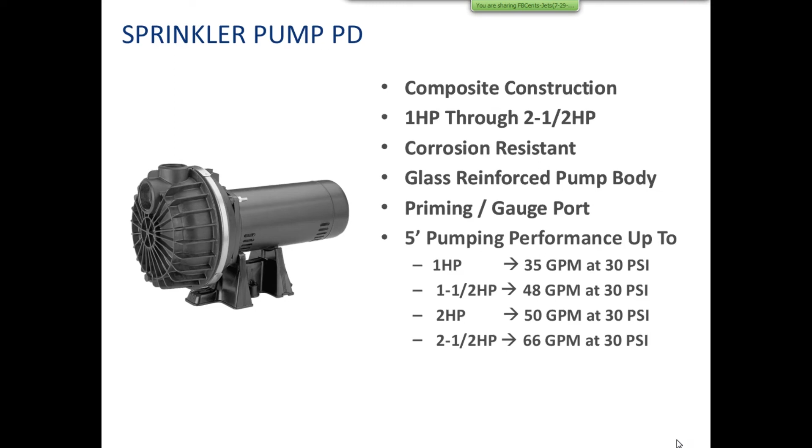The D series pump, and this picture here is the 5 horsepower. Cast iron construction, big rugged pump. You see the big forehead on there, that was really made for priming. Okay, it's a general purpose centrifugal pump.

What they mean by that is, while we do offer it as a sprinkler pump, our pool division offers it as a pool pump. So it can be used for several different things.

It does come 1 through 5 horsepower. The medium head models go up to 143 feet at shutoff, or 146 gallons a minute at your best efficiency point. That's not the end of the curve, that's the best efficiency point. Your high head has a shutoff head of 163 with 115 gallons at your best efficiency point. Obviously the pump will do more than that, but best efficiency is 115.

They have Noryl impellers in the 1 to 2.5 horsepowers and bronze impellers on the 3 and 5. You'll notice when you look at the front picture of that pump - let's go back for a second to show you - look at the front end of that pump. There's a square end on it, and there's no threads, which means you can't hook this up.

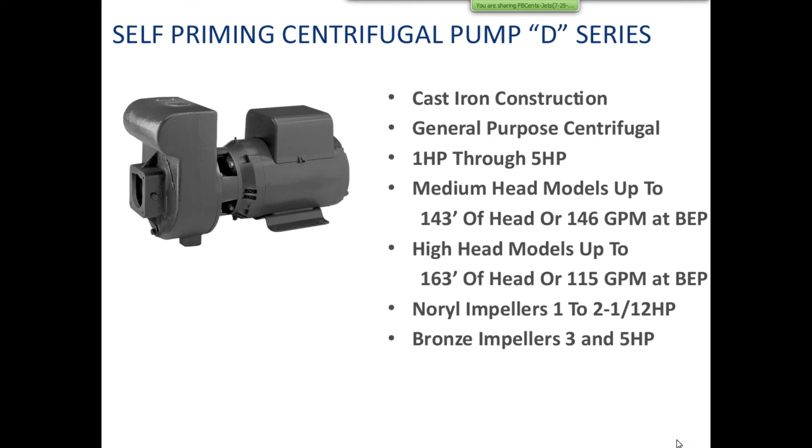First one of these I sold 22 years ago when I was in customer service. The guy bought the pump and was so happy. He gets the pump, opens it up, calls me back and says, 'How do I hook this pump up?' And I said, 'Well, don't you have a suction flange?' He said, 'Well, you didn't offer it to me.' So it's my fault that he didn't have a suction flange. The next thing I know, I'm next day airing a suction flange out. He's paying for the flange, but I'm paying for next day air. So that was the only time that mistake ever happened.

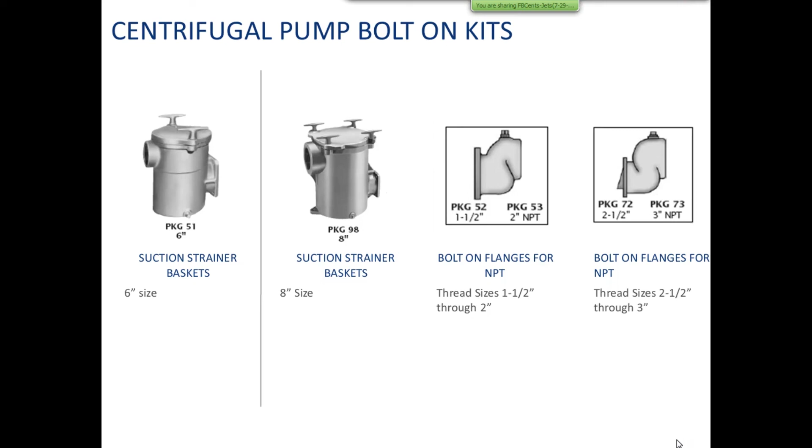Any time after that I saw a D-series pump - and remember, D-series goes 1 through 5 - anytime I sold a D-series pump, I made darn well sure that customer had one of the suction flanges. As I mentioned, it can be used as a pool pump, so they do sell suction strainer baskets, either in 6 or 8 inch, or suction flanges. They're bolt-on, and they have an NPT thread on them, so you can thread the pipe in. The 52 and 53 are your 1.5 and 2 inch, and the 72 and 73 are your 2.5 and 3 inch. I always recommend the biggest one - that's my recommendation, always put the biggest one in. That way you know your pipe size is going to be okay for whatever you're asking the pump to do. As a matter of fact, you put that big one in on a 5 horse, you may want to increase your pipe size.

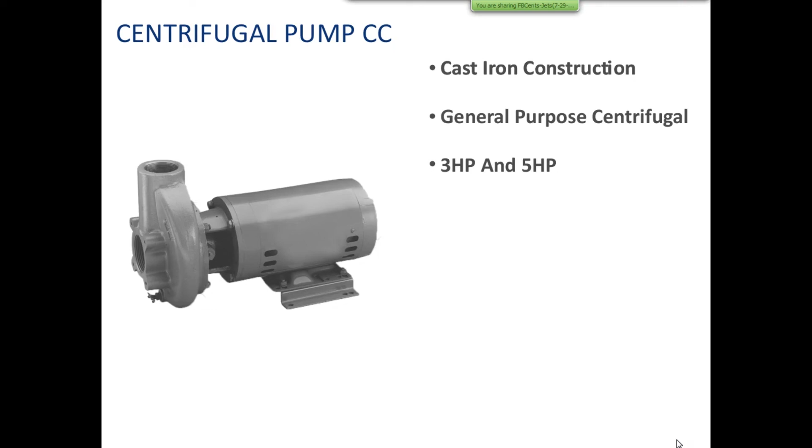The CC series is a centrifugal pump. Again, this one is sold only in the Sta-Rite line. It is a rugged cast iron construction, a general purpose centrifugal pump, and again it can be used as a pool pump. You'll notice it's got the same bolt hole pattern as the D series, so if you wanted to bolt not the suction flange - because you can see that this one is threaded on the inside - but if you wanted to bolt a basket on there, you could. It comes as a 3 and 5 horsepower pump only, and only comes with a silicon brass impeller.

A multi-position body means that if you take the bolts out of the seal plate, loosen that seal plate up, you can pull that body off and turn it and move that discharge in any direction you want. It's got a high GPM performance, and comes in a medium head and a high head model. The medium head is 75 feet of head or 200 gallons a minute - now that's at the end of the curve, not at the BEP, just so you understand that. High head models are 100 feet of head or 250 gallons a minute - again you're at the end of the curve, and you have a 5 horsepower here.

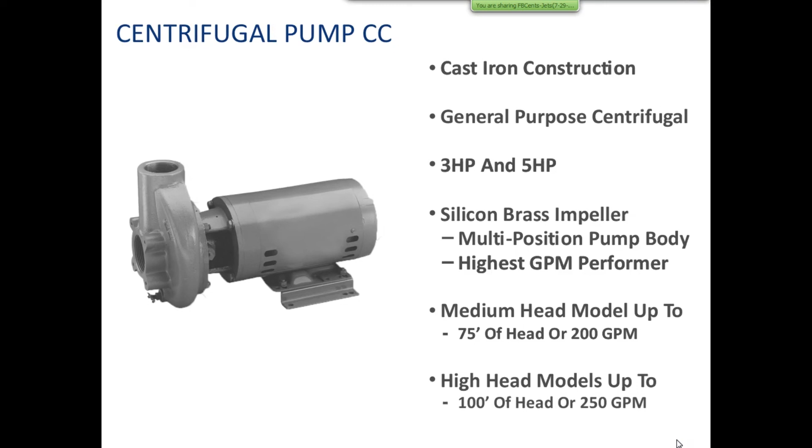I love this little pump here, it's called the DPC - I take credit for saving this pump. Back in the early 90s, this pump was under the SSE group, and it's got many uses. It's a little self-priming pump. You can use it to drain water beds, aquariums, pump water out of a basement if you got a flooded basement. So it's a nice little handy pump in that respect.

We had a guy that was using it in Michigan, and the product manager at the time decided he wanted to use a less expensive pump, because this one is a little expensive to make. It's all cast iron construction, so he wanted to do a plastic version of the pump. And he didn't use that good A.O. Smith motor on there - instead he used what is called a brush motor.

If you've ever worked with a brush motor, you know they tend to be very loud. So the guy who bought these out in Michigan said, no, I'm not using that HC pump. And I said, well, I'm sorry, but we don't sell the DPC anymore. And the guy says, Bill, I got to have that DPC pump. I said, well, let me see what I can do.

So I called the product manager up, and I said to him, I've got a customer that wants this DPC pump. He says, Bill, we're not selling it no more. I'm telling you, it's done, it's obsolete. I said, well, let me ask you this question then. He's willing to buy the rights to the pump from us and make it himself. He says, oh no, we're not going to do that. I said, well, if you're not going to sell him the rights, and you don't want to make the pump anymore, that's not really fair. Give him a number.

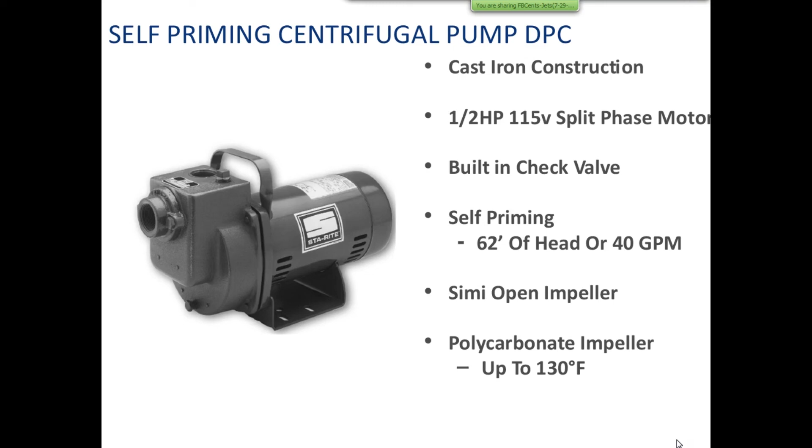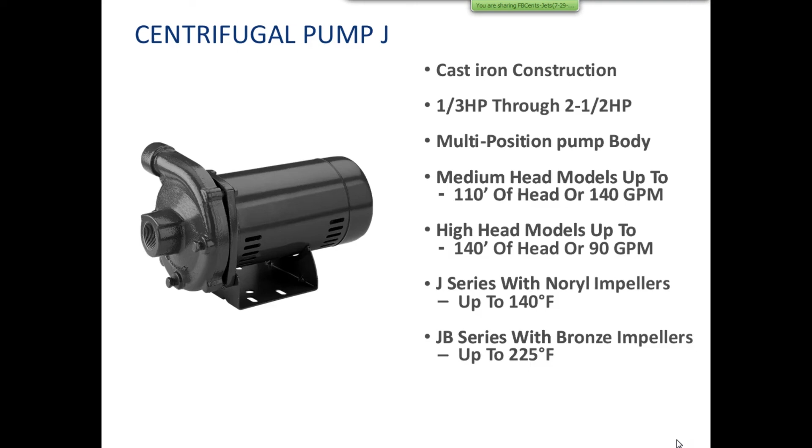Okay, any questions at all?